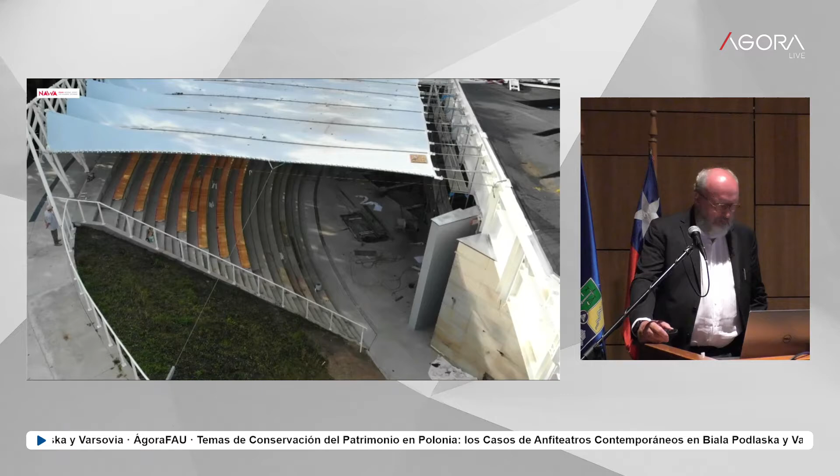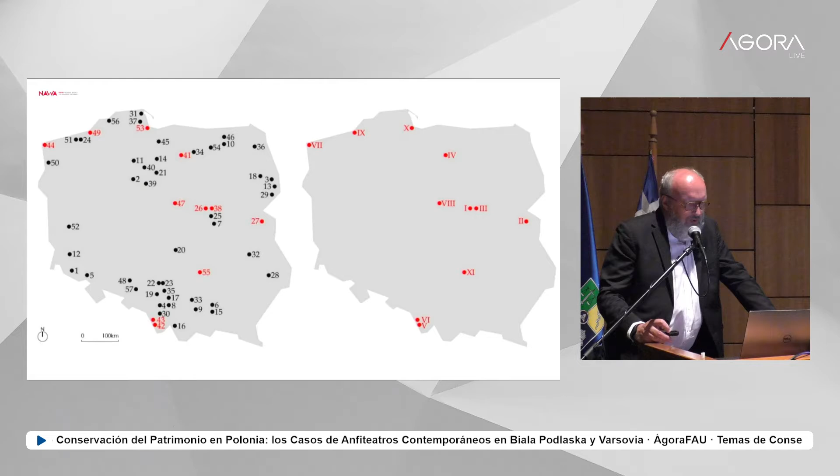This film shows us one of the Odeons - in my lecture, Odeon is the term I use for an amphitheater which was covered by a roof. Before I show you two designs, I'd like to show some research I did and published, depending on amphitheaters built in the last 30 years in Poland. On the left you see the map of Poland with dots and numbers - these are the amphitheaters. On the right you see the Odeons, meaning the amphitheaters which were covered by a roof.

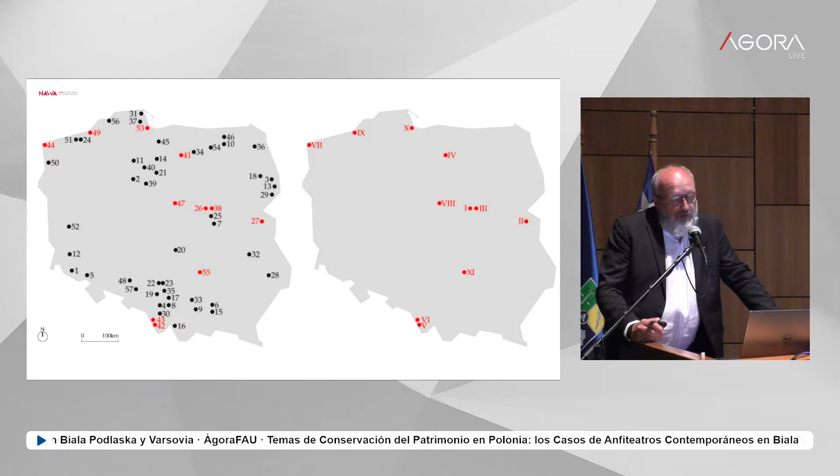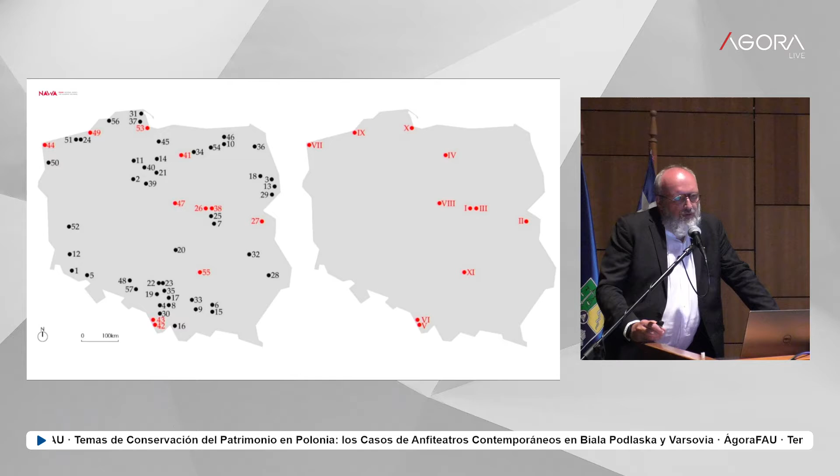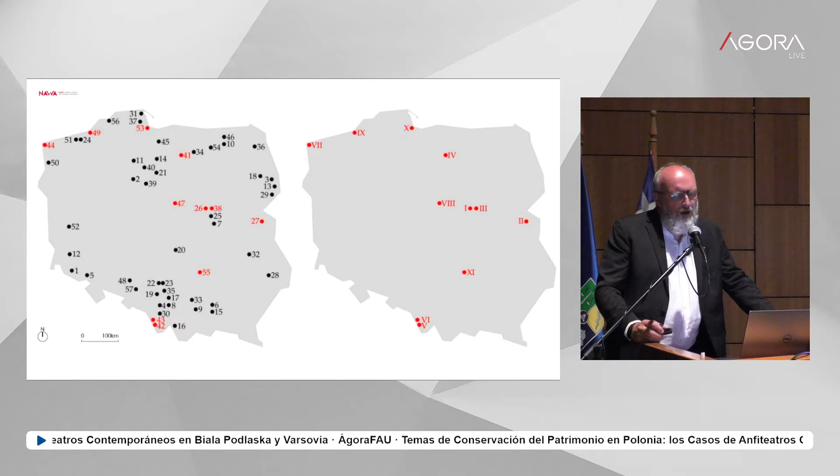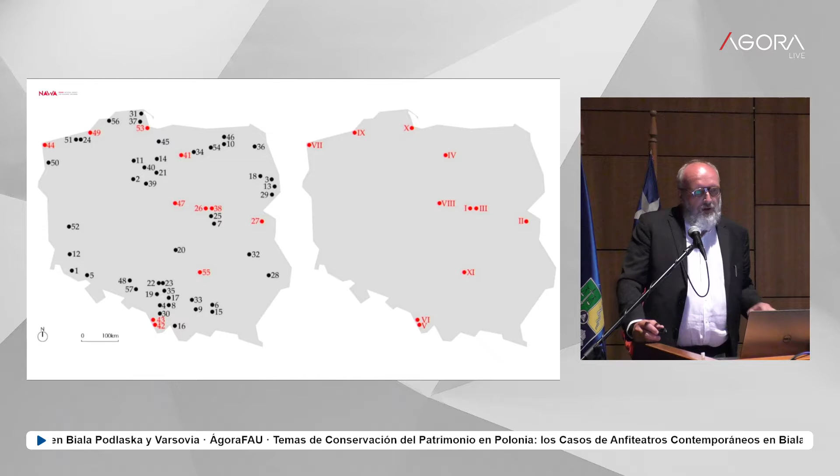The climate in Poland is relatively hard for open-air activities, because if an area like an amphitheater is not covered, it can only be used from June to the end of August or beginning of September. But when we cover it, we extend this period twice - we can use it from April until the end, or mid-November, because the temperatures are quite good in this time, but there's a lot of raining. Especially characteristic of Poland, in the middle of summer, beginning of August, we also get a lot of rain. So if we want to use amphitheaters as open space and be sure we can organize something, we have to cover it - this is one of the reasons.

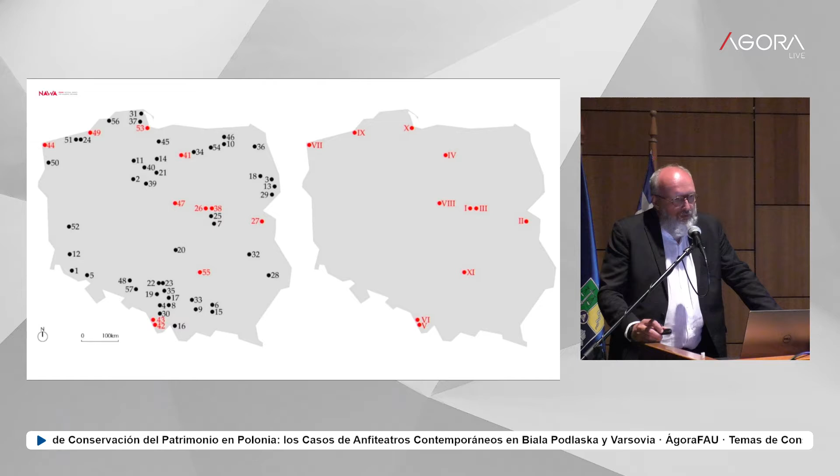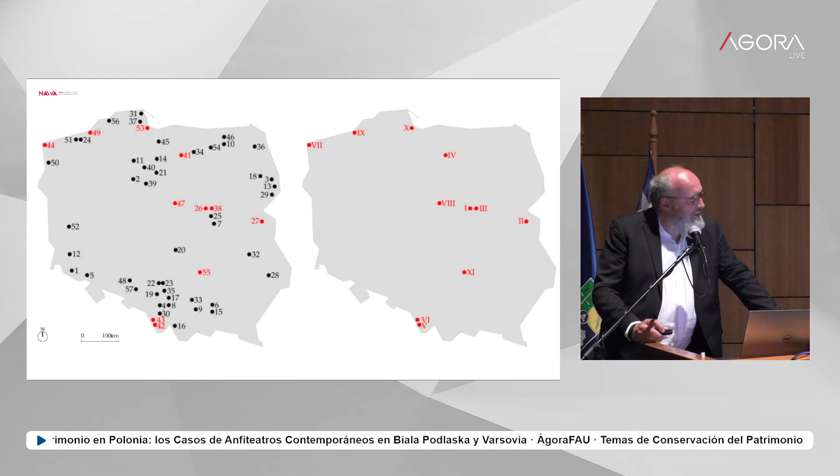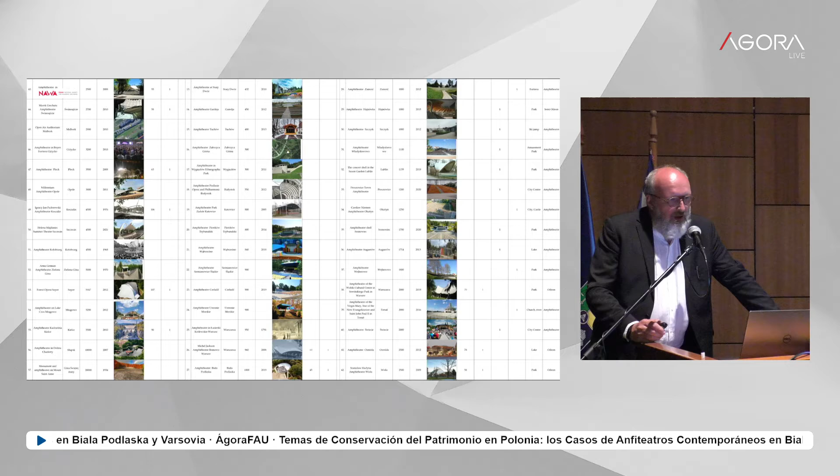The second reason is money, because for a long time Poland had problems with the economy. But during the last 30 years, after transferring our economy to a much more efficient model and becoming part of common Europe, the money came, and the Poles are using this money, also a part of it for extending cultural capabilities. Building the Odeon is one of the values of being part of Europe. Here you can see a collection of amphitheaters in different forms, following my research - take a look for free at these Odeons.

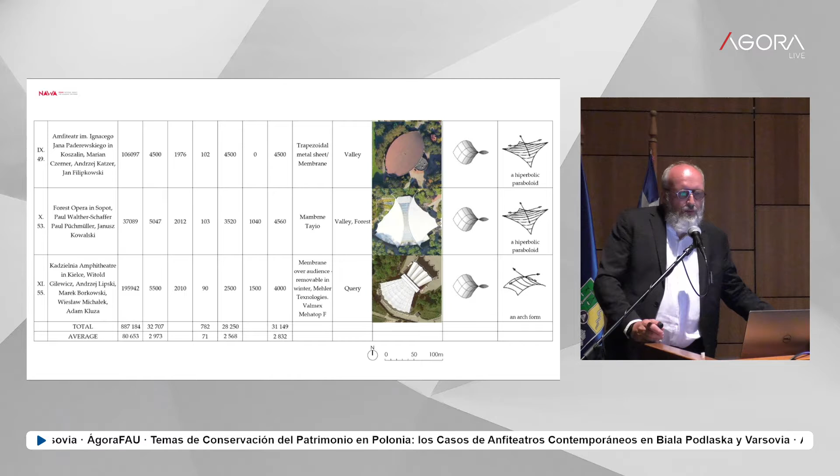Because I would evaluate the size of the covering, the structure, how the form was created, and other elements. Finally, we can see a collection of all these Odeons which were built in the last 10 years in Poland, starting from the smallest one, from 800 spectators, finishing - this one on the left corner - down on the right corner with the biggest one.

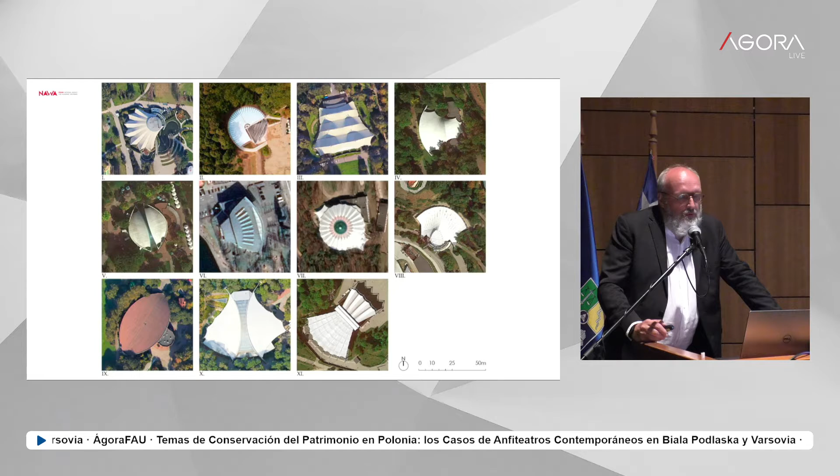About 6,000 people - so this is the scale of the Odeons. Our Odeon, the second one, is for 1,000 spectators. What is interesting is that the shape of the covering and the forms of all these Odeons are different - we cannot have two similar forms. The ideas are different, the shapes are different, and this is one of the results of the research.

But what happened inside such kind of building is also part of the study. As you see, concerts of well-known artists are the main important activities, and sport performance is a less important activity.

Also what is interesting is that a lot of these buildings are built outside huge cities. It's relatively in small cities where the people cannot use concert halls, the regular culture buildings, and this is one of the values that we got. We can bring culture to much smaller towns and cities, or in big towns, in some parts, like some suburbs of big towns - it also exists like an extended possibility.

If we take, for example, Warsaw, we will see one of the examples from Warsaw. At the moment, Warsaw has a lot of concert halls because it's the capital of Poland, but in some areas, some suburbs, there's a lack of such kind of culture building, and for this reason they decided to build an amphitheater.

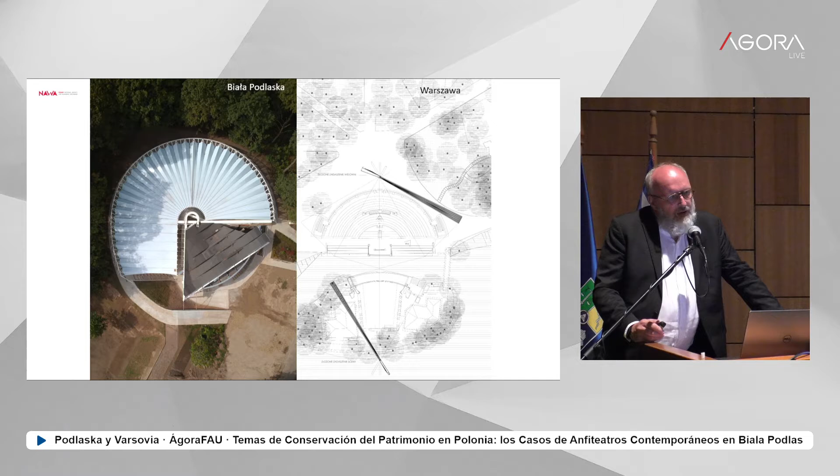I would like to show you, as I said before, two of my designs which were done in my office. One is in Biała Podlaska, a small town near the eastern border of Poland, very close to the Belarusian border. The Polish-Belarusian border is very famous in the news.

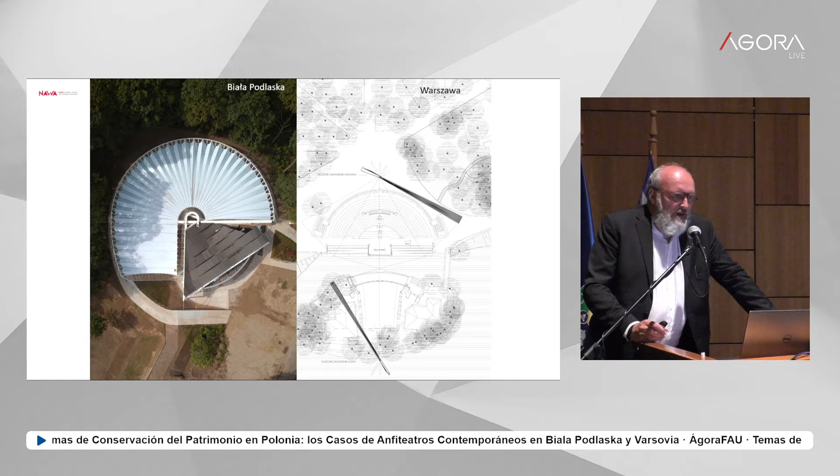I don't know how it's published here, but probably you heard something about this - that we have a huge influx of immigrants from the Belarusian side. Anyway, Biała Podlaska is very close to this area.

And then the second is in Warsaw, in the very historical Royal Park which we call Łazienki - King's Bathroom. It's from the 18th century urban scheme from that time.

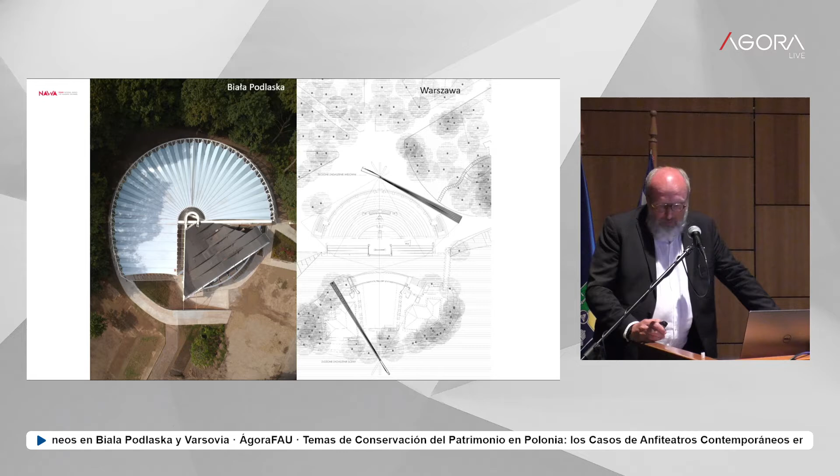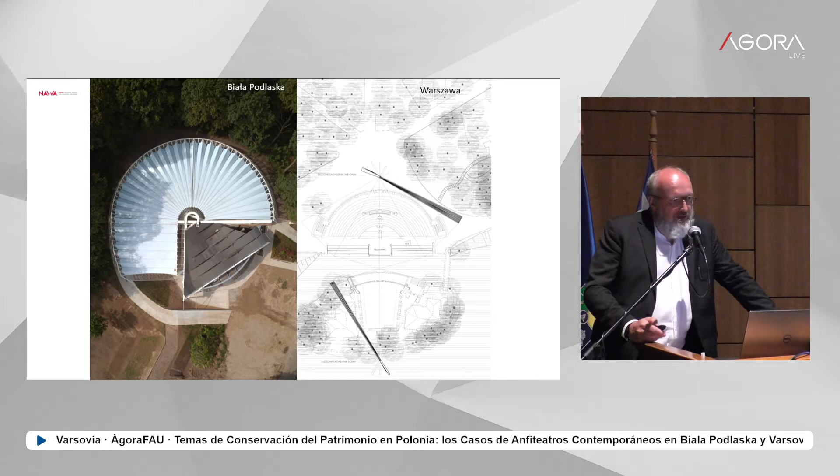Biała Podlaska is also interesting because it has a 17th century fortification based on the Dutch or Netherlands concept of fortification from that time, not far from the palace in Biała Podlaska, because it was the royal family which also had some palace there.

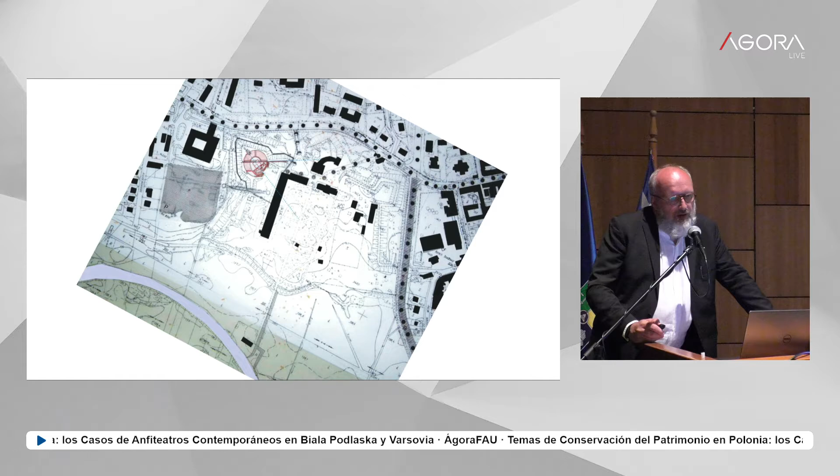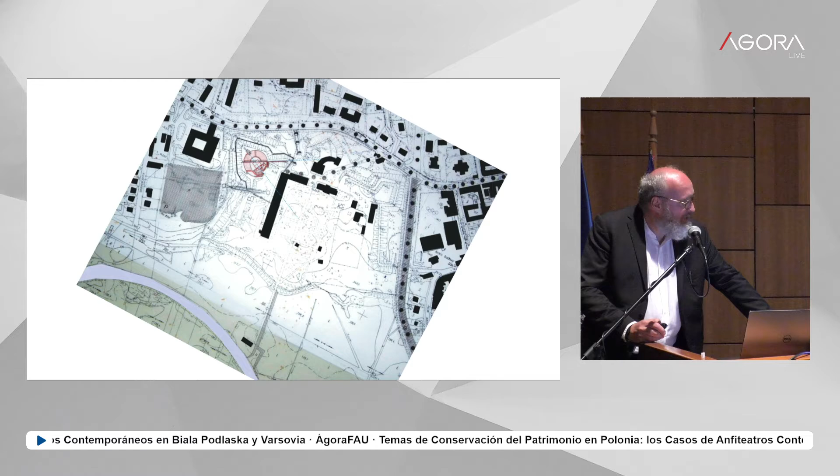This shows our first concept, because we won the competition in the mid-90s, so it's a long time ago to prepare and to build the amphitheater.

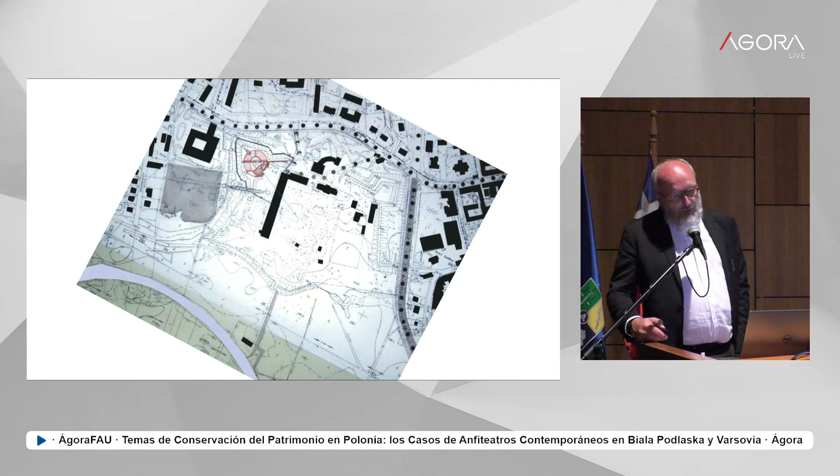During this competition, we won mostly by using the geometry of this fortification. We studied the geometry, how it looks, and we decided to build in one corner, the left corner, marked by red color. It's a new intervention into the old structure.

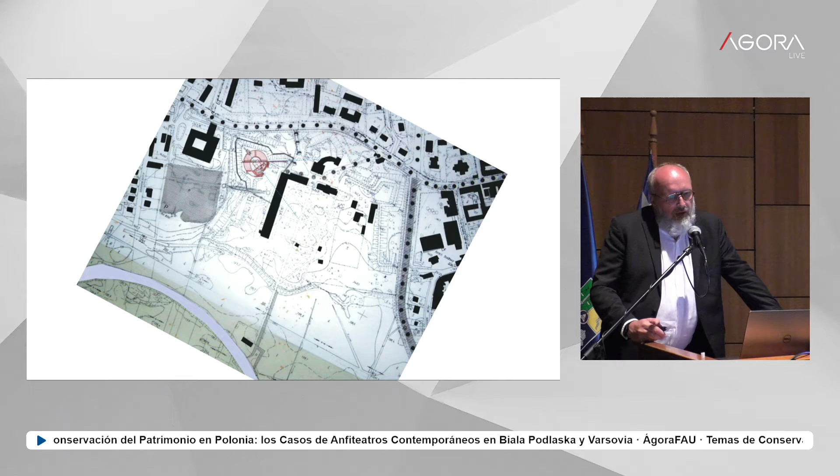The building on the right, marked by black color, is the support building for the palace, and the palace doesn't exist anymore. The palace had its place somewhere here - it was located in this place before.

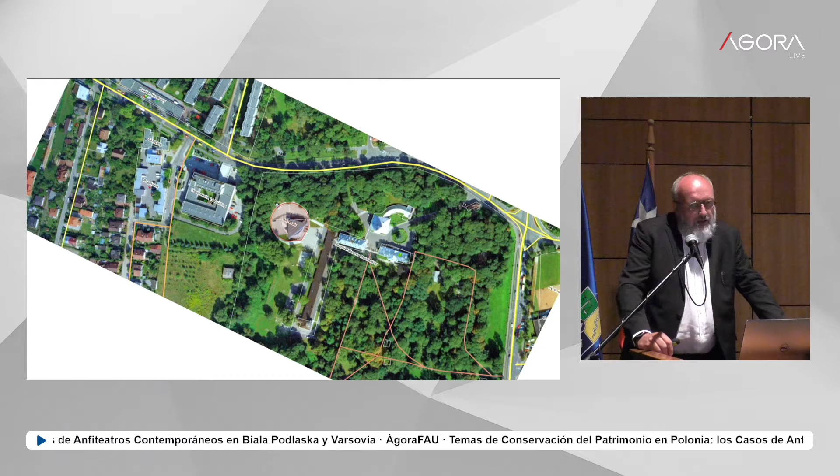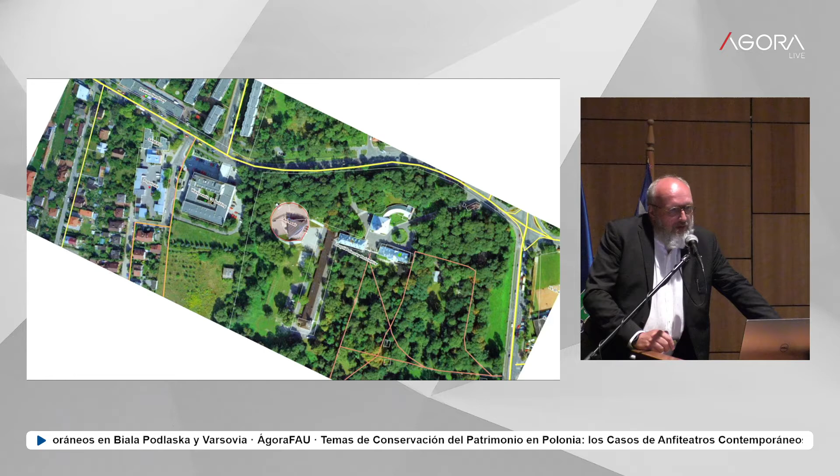All of this fortification was covered by green, and it created a park. It was a very interesting park, but the greenery there had no design. What happened in the following year, as you see, there's a lot of greenery here, and also our first concept and first realization of the amphitheater looks like this compared to the area.

But this area was under protection by the conservator - a kind of administration office in each Polish town, especially in towns with historical background. In Biała Podlaska there's a very strong position held by the man who takes care of conservation.

He was open-minded, in my opinion, because a lot of conservation guys are against anything new. But he gave us only one rule: we cannot make the structure higher than 3 meters over the old fortification. That's why we decided to design the amphitheater in such a way that we dig something inside to create a proper scale.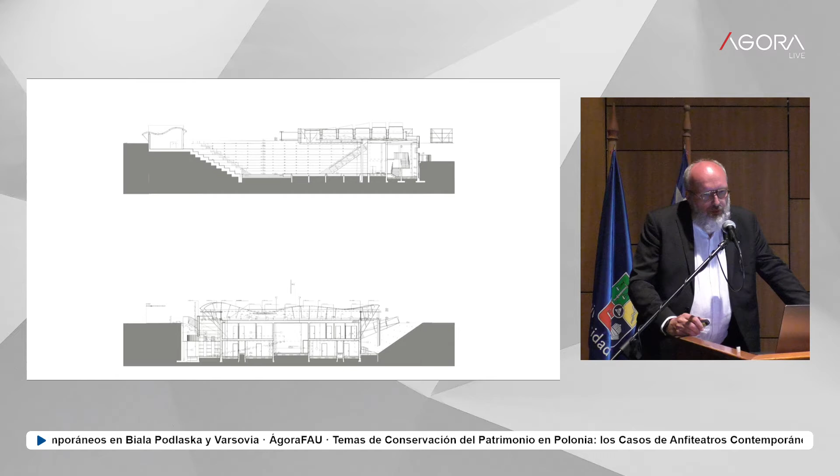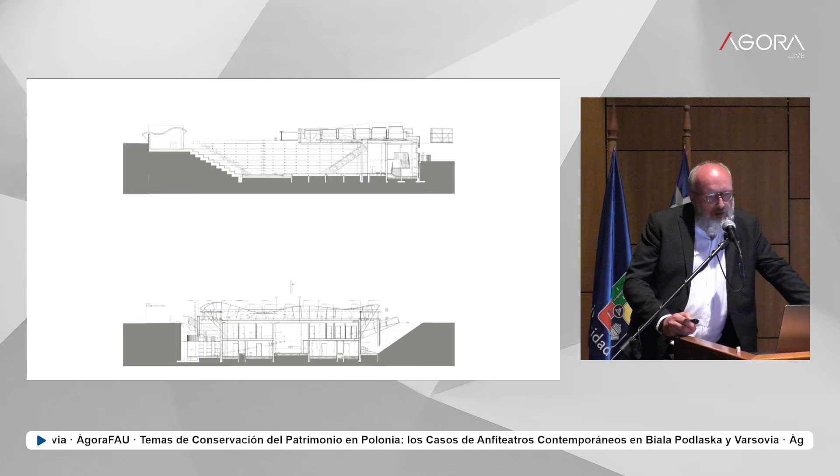As I said, we cannot break the rule of 3 meters over the fortification. Here it's very clear on the section, because we dug down a little, and finally got the difference between the roof structure and the stage level to be about 10 meters high.

It was one steel structure. Maybe you're interested in what is under this steel structure, because during construction it was stopped for 2 years, since at one moment we found old walls, and these old walls captured the imagination of the construction office at that time.

They thought it was the first building in Biała Podlaska, and for this reason they wanted to show this building and stopped construction to make new documentation. We agreed to cover it with the steel structure, and you can take a look underneath to see what happened with this wall structure. But it was not very good for the stage, because the stage was divided by an extra element which was not in the first concept.

But finally, 4 years ago, they decided to cover the amphitheater, and they called us to do it. So we prepared 3 schemes for how the covering could look, and what kind of structure we could use, and finally we started to create the Odeon.

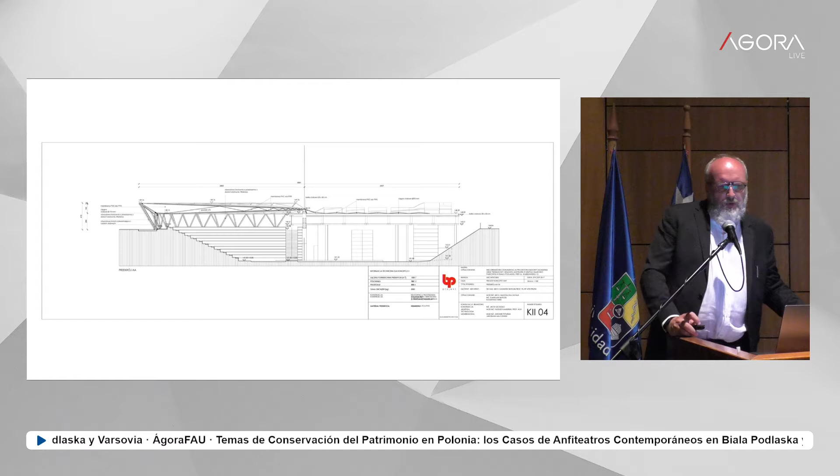The Odeon began with removing all the spectator area and cleaning it, and choosing one of the concepts which you can see here. Again, we are not changing the shape - I mean we are not changing the shape of the section and the depth.

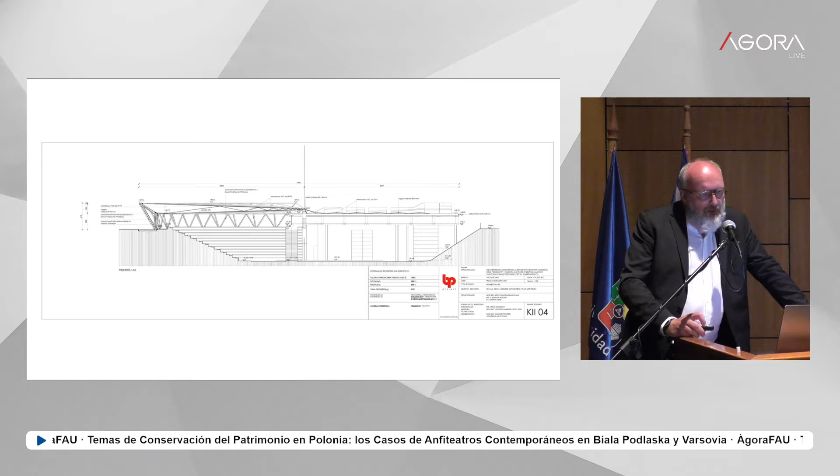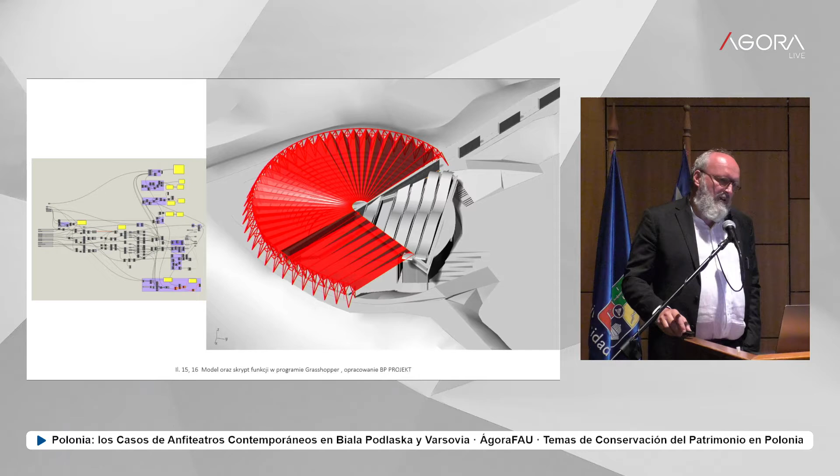We also wanted to stay within the 3 meter level, not crossing that level over the old structure and the primary design. But the problem, if we design this building in such a flat, relatively flat structure, was how to solve the problem with the water.

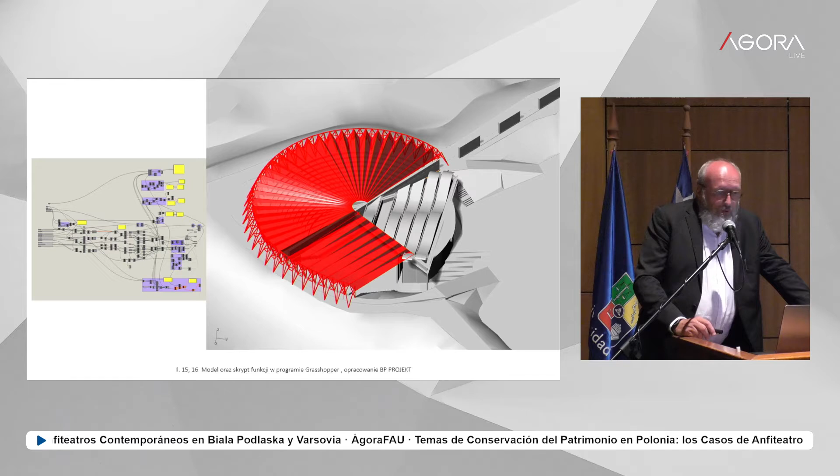For this reason we made a lot of models and finally decided on the shape you see here, because this way, being relatively flat, we can drain the water out. So the idea was to fold the structure using 2 geometries for folding: one is the semicircle, and the second is more or less rectangular.

What have we done - how does the addition, the Odeon creation, look based on the amphitheater? It's shown in 3 steps. First, we have the existing structure - especially this beam - which was not strong enough, so we added some construction elements there. Then we made the circular, transparent steel construction, and finally we covered it with the semi-transparent membrane: first, second, and third.

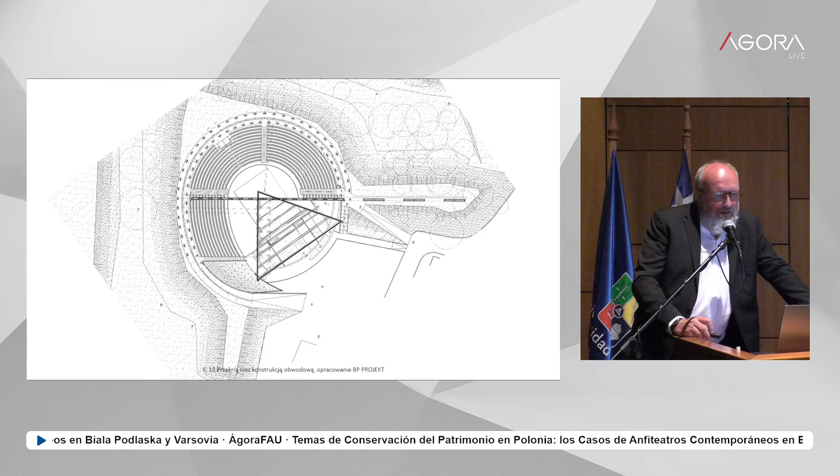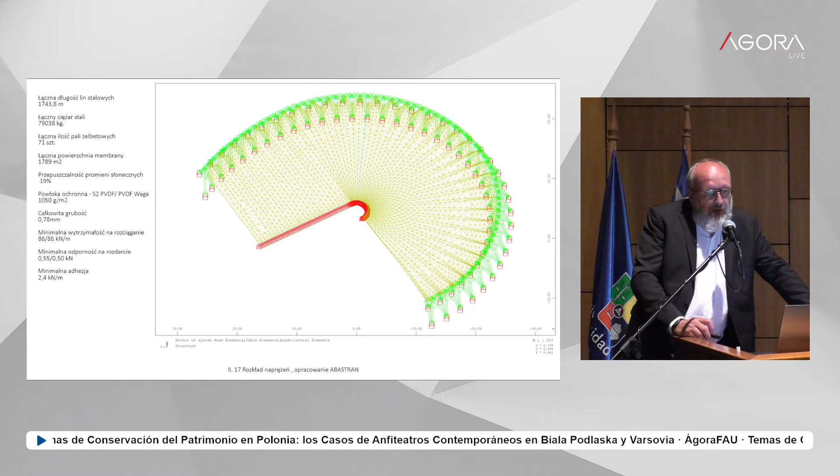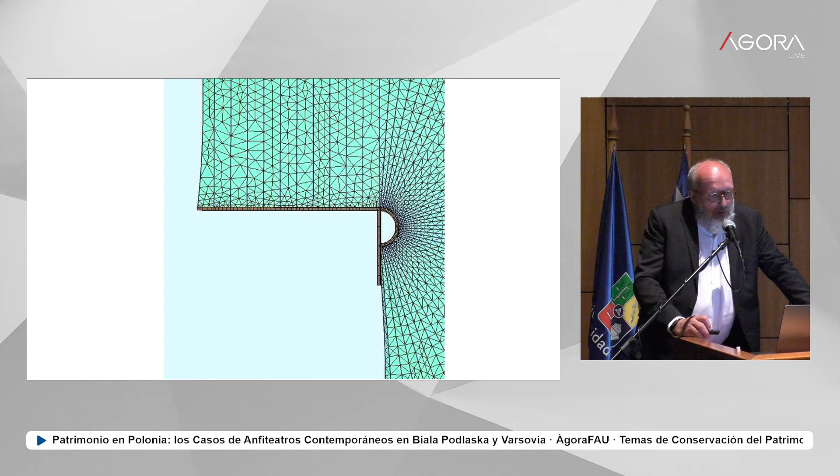So, the drawing from the construction stage, and again the structural analysis showing the strength of the materials, because the membrane is also part of the structural system, not just a covering material. So this is important during evaluation. Here are some details of this analysis, which I also found interesting from the aesthetic aspect of this design.

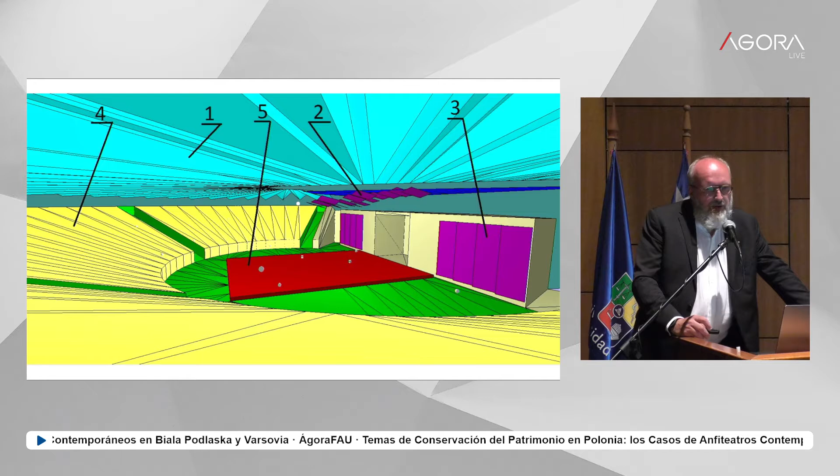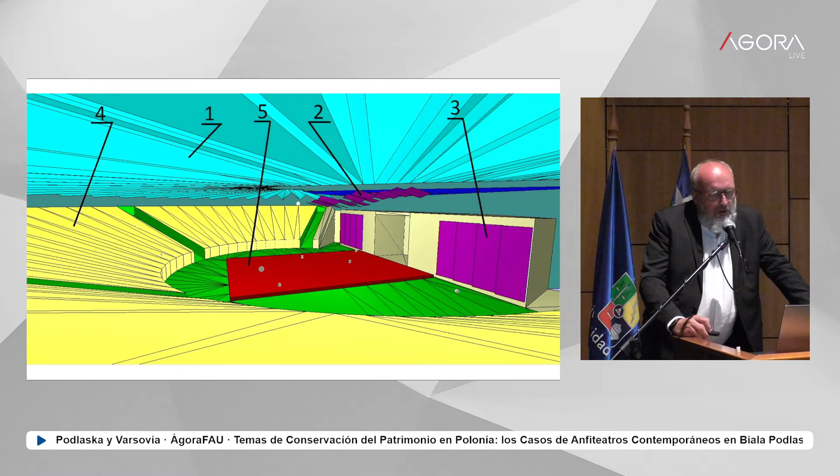But not only was construction a challenge in this design - also the voice preparation, especially since you'd like to use it like part of a concert hall. For this reason, we did detailed research on how to improve the quality of sound propagation. Here you can see some analysis - blue and green marked areas mean good sound propagation, and as you see, only some parts, especially at the end of the circle marked red, show that the sound propagation is not the best, but it's relatively reduced.

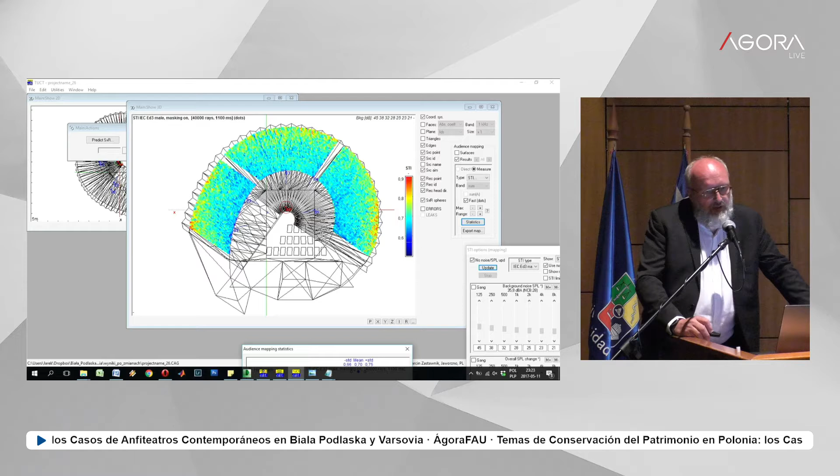So the shape of the roof was first important for water drainage, but secondly it was important for sound propagation, and this folding gives us very good sound quality. This was the final design, and it looked like this. But at the same time, the city also decided to make improvements to the park.

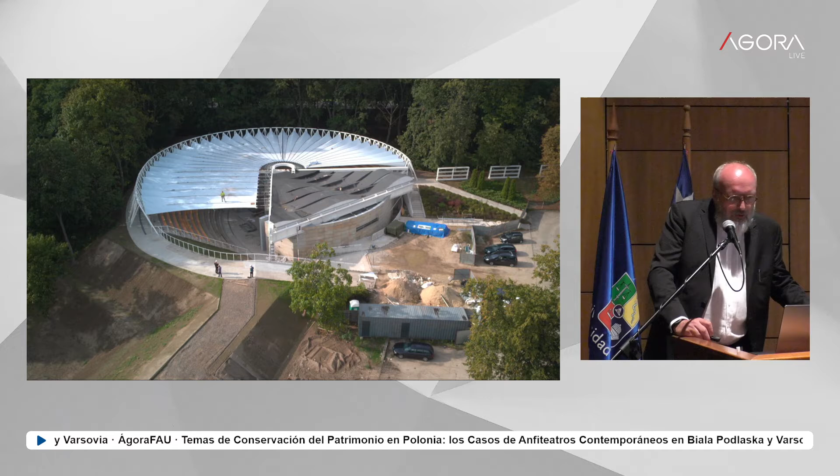Some pictures of how it looks today. What I'd like to express is that it's a very thin structure, but it's also very strong, because we can walk on it and also clean it. This man standing on the roof shows us one of the possibilities, that we can walk on it.

Another interesting and a little bit unexpected effect was that some leaves during part of the year lie over the structure, and it takes another shape, another view, another effect. Also, the strangeness of the structure gives us not exactly a straight line, but a line which is a little bit curvy. Here you can see it just before finalization.

I stop at this moment because, as you can see, today this steel structure covering the old walls doesn't exist.

What's interesting is that during the 15 or so years between the opening of the amphitheater and the opening of the Odeon, the conservation concept of these walls changed, because they discovered it wasn't the first building in Biała Podlaska, it was a relatively unimportant building, and for this reason they decided to remove it and only leave some sign that such a structure existed here before.

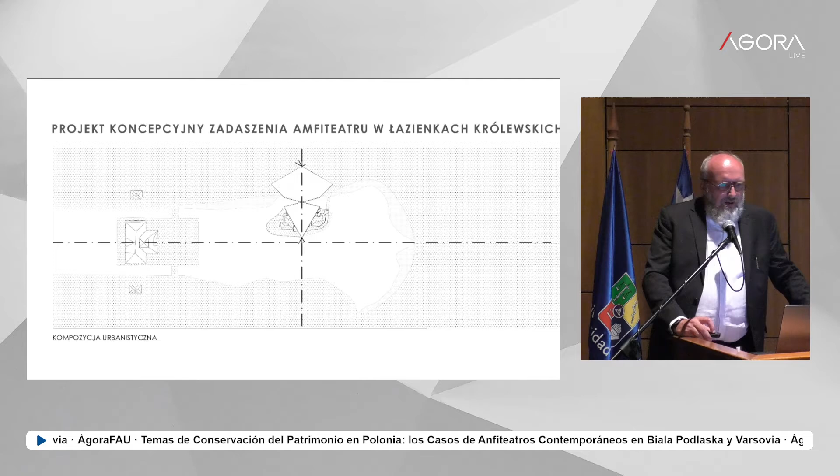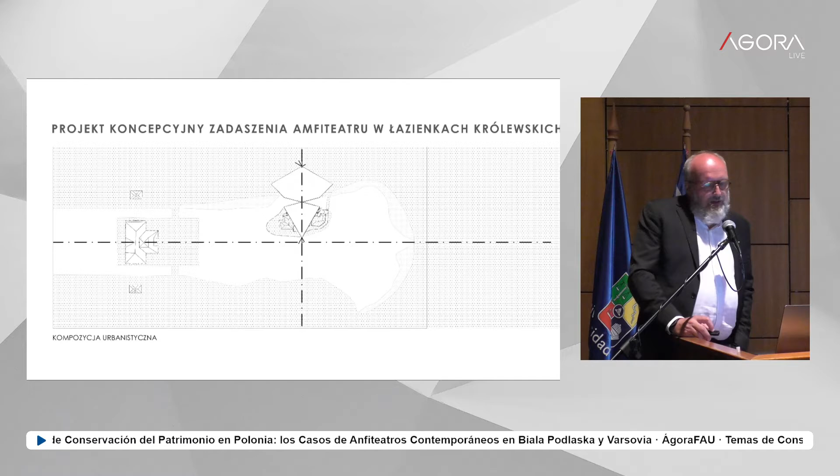This is the oldest Polish amphitheater, which comes from the 18th century, and it's an artificial thing also.

A year ago there was a two-stage competition to prepare a temporary covering of this existing 18th century amphitheater. We took first place in the first stage, and then first place also in the second stage. I'd like to show you what we did, and also explain why it wasn't realized after the discussion of the jury.

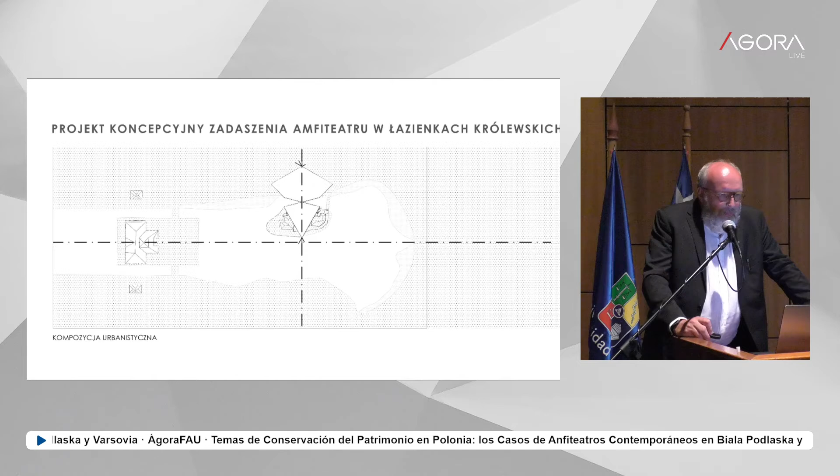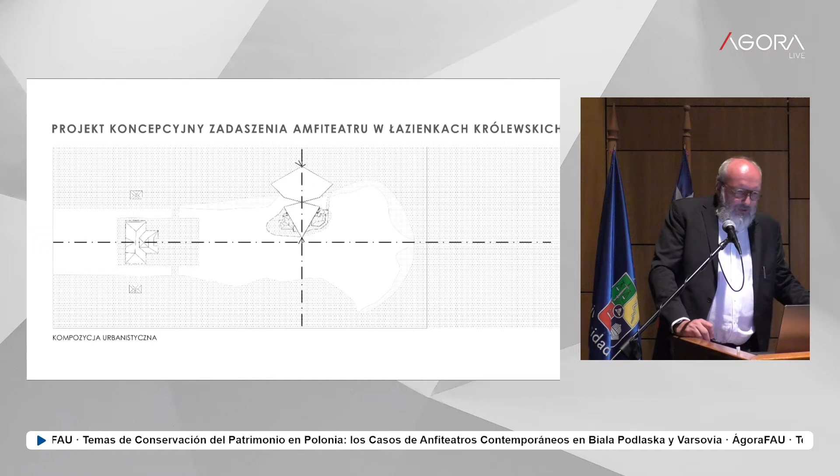The rules of the competition were that we cannot build a ready-made structure which stays permanently — it has to be a structure we can remove. For this reason, they expected that the intervention into the existing and very valuable park and amphitheater would be as minimal as possible.

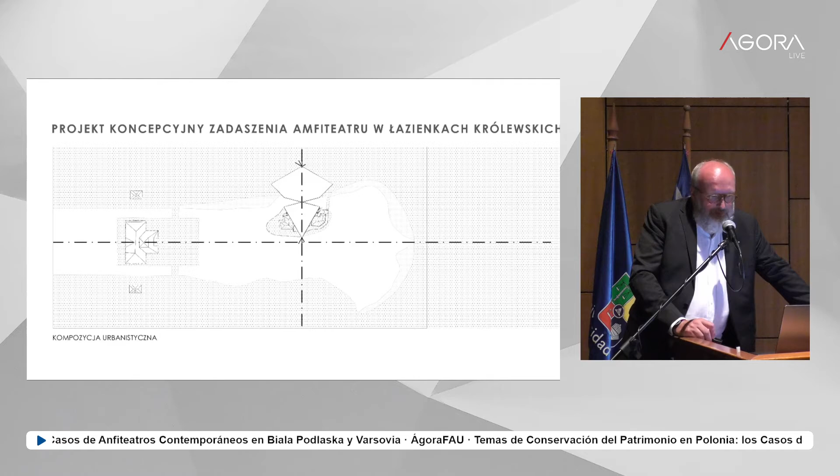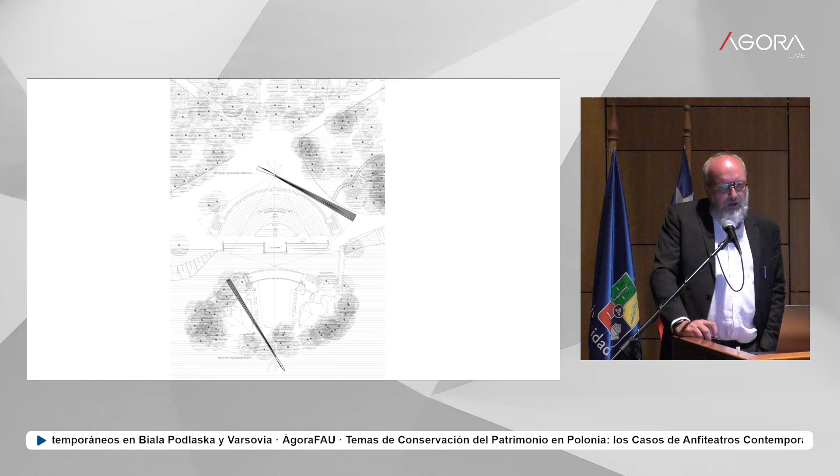Our concept was based on a movable structure with only two pillars — one pillar behind the spectators' area, and the second pillar behind the stage. Here you can see the concept in the position which is not open.

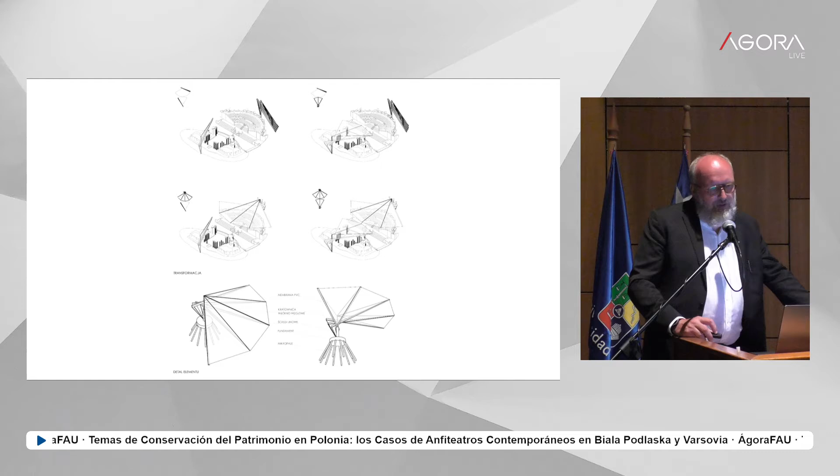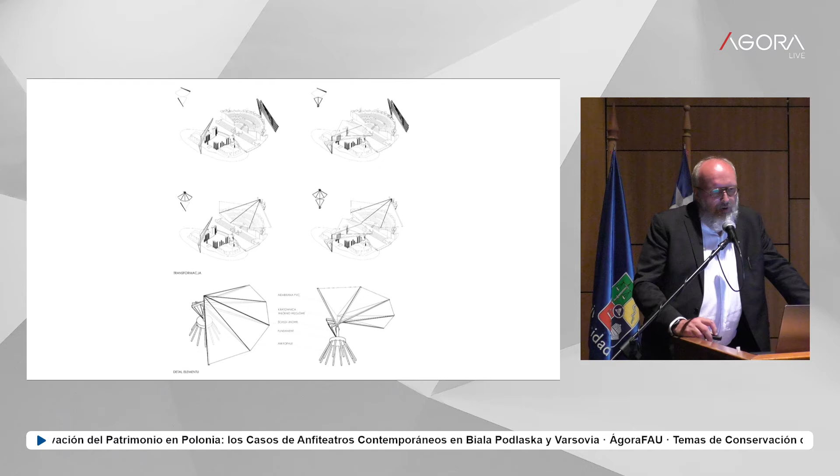Then you can open it in many variants. You can open it over the stage, like in the right picture, or you can open it only over the spectators' area, or you can open both. So it's a movable structure, depending on the needs and how you decide to use it.

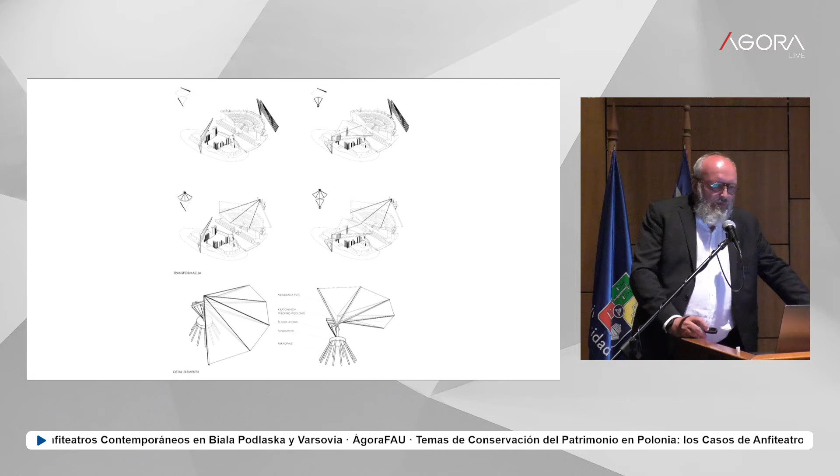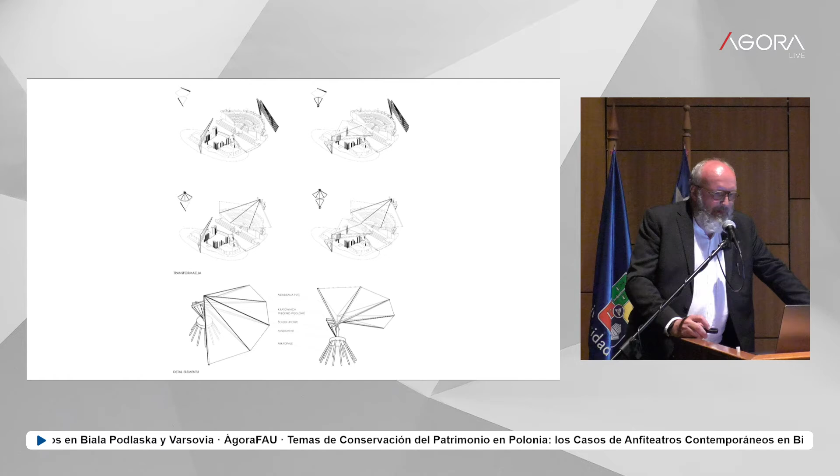We only have one pillar above, but as you can see the structure underneath is relatively big, because it's a huge construction element, and there's a lot of pressure from the water, from the wind, and from other factors we have to resist. So what you see under the ground is a relatively huge structure, but above the ground it's relatively small.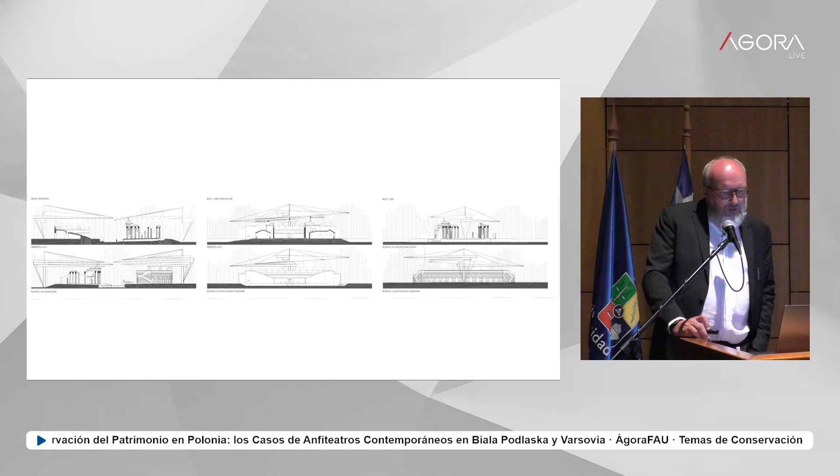And how it's working comparing to the existing, here you can see some pictures because it was the movable element based on this column, and all of this was over the existing structure, how the section and elevation shows. I hope that maybe it's clear to see.

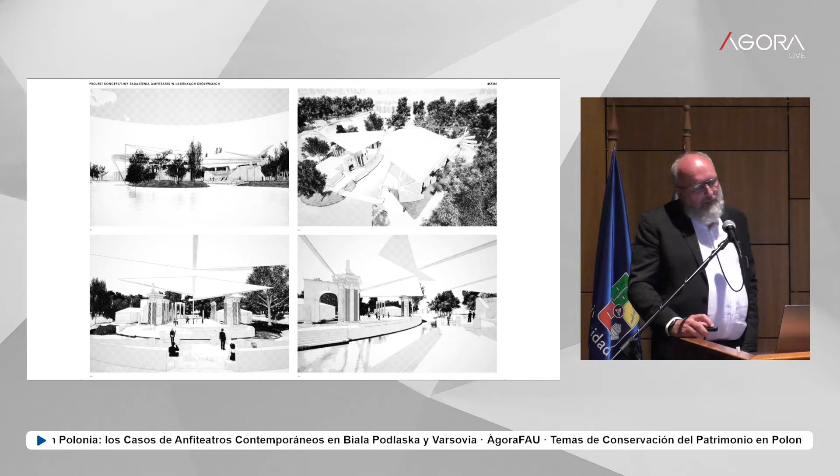And here we can see some elements, some renderings, how we imagine that it will be working. How you see, the concept is very symmetrical. And some other pictures look like this.

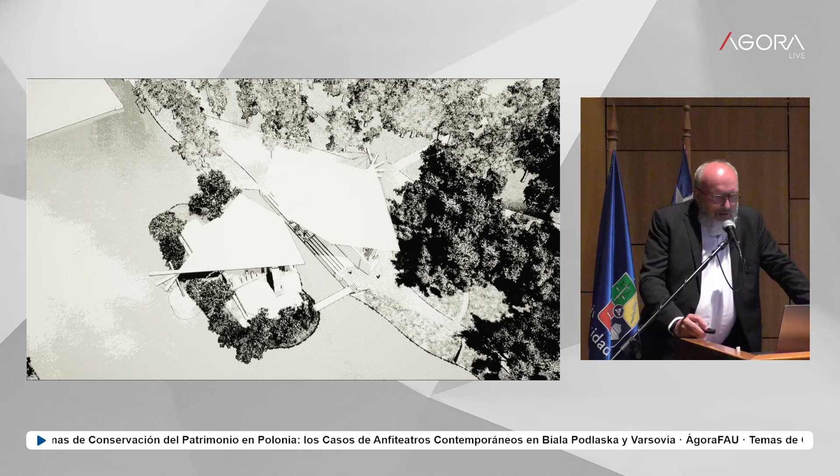What was also interesting, and maybe I haven't said this before, is that the stage area was over the island, so one of these pillars was located under the water. And again, this concept from another point of view.

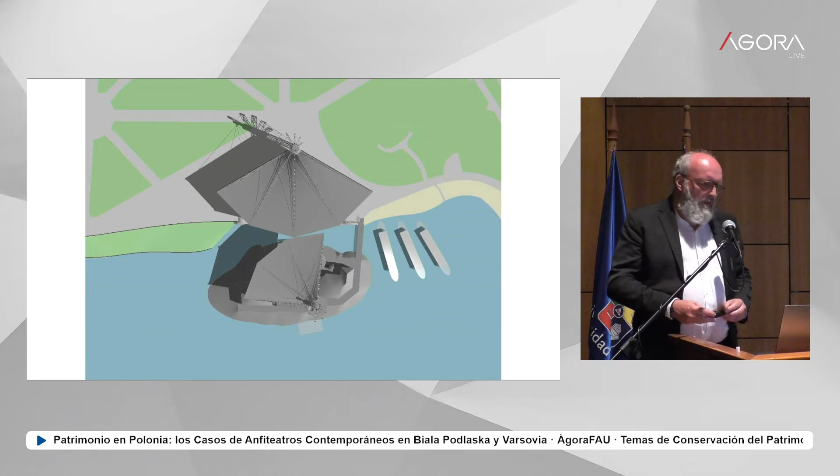And here, after the first stage, the jury gave some remarks, and one of the remarks was that they weren't happy that one of the pillars is at the back of the stage. So in the second stage of this competition, we decided to move it a little bit to the right and make the composition asymmetrical. This is one factor.

And the second question after the jury review was what happened with all of these elements when they are dismantled. You can see on the right side some images of the boats, because we got the idea to take it out and put it into the boat, so the boat will be like storage. So that is another concept from the second stage.

And again, you can see how it looks, our second stage entry. We also made these pillars a little bit more visual, meaning there is not a solid structure, but this is a structure made from many elements to be much more transparent. And finally, images of how it can work.

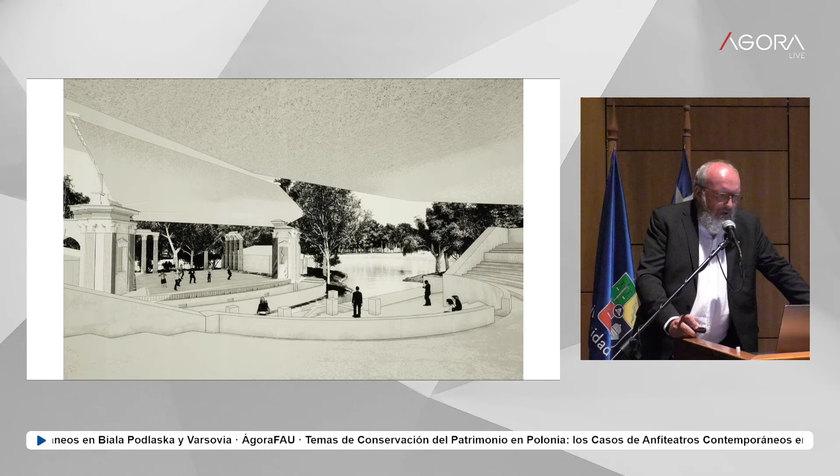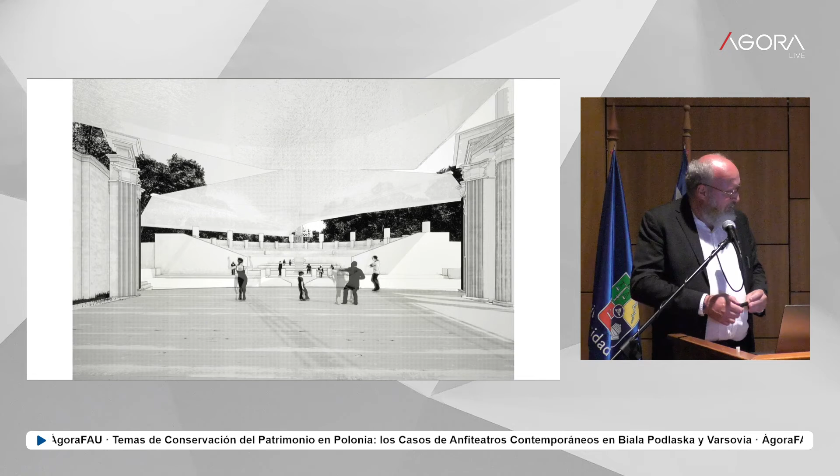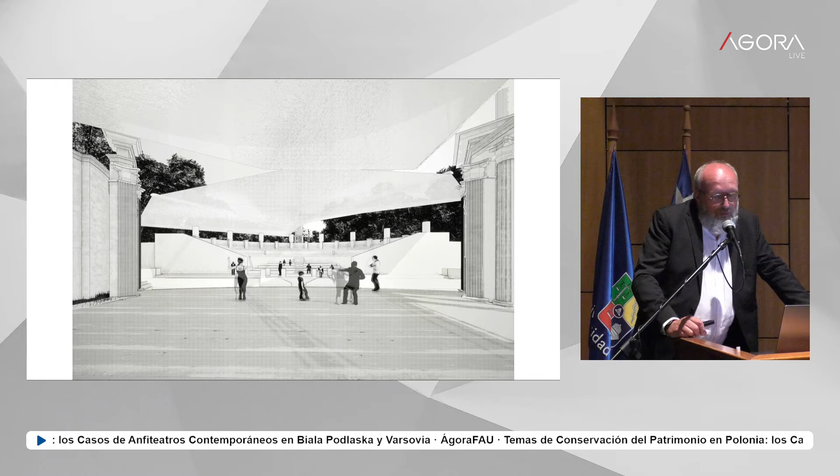And this is the last picture which I would like to show you. Coming back, to finalize something - this design wasn't built because, under the competition, there was a huge public discussion, and the people decided, talking that this intervention is too strong comparing to the historical value of this area, so they decided not to build it. I'm not happy about that, but sometimes it happens.

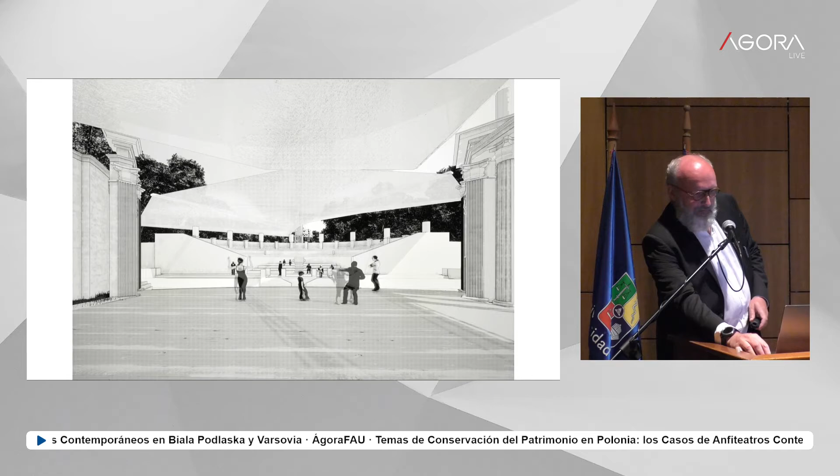Yes, absolutely. Yes. Okay. Mm-hmm.

So, first of all, there's the question between the first amphitheater concept and the final concept of the Odeon. This beam, we can call it, existed in the first concept as a very light structure, which we called the light bridge, and it was going up and down, and it was only one line in all of this park. But finally, the rules on how to conserve it meant we had to leave it.

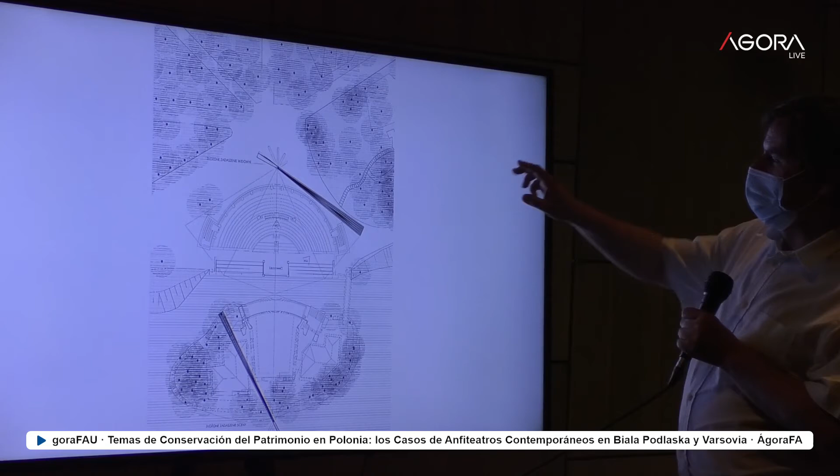Okay, and about the second project - yes, I'm going to the drawings. This drawing is in black and white. Black and white, what is the technique? It's very beautiful. I know they are beautiful, but to tell you the truth, I have to ask my son, who is also my partner in the office, so it's not my way. So as usual the architecture works - but there is another one about the views.

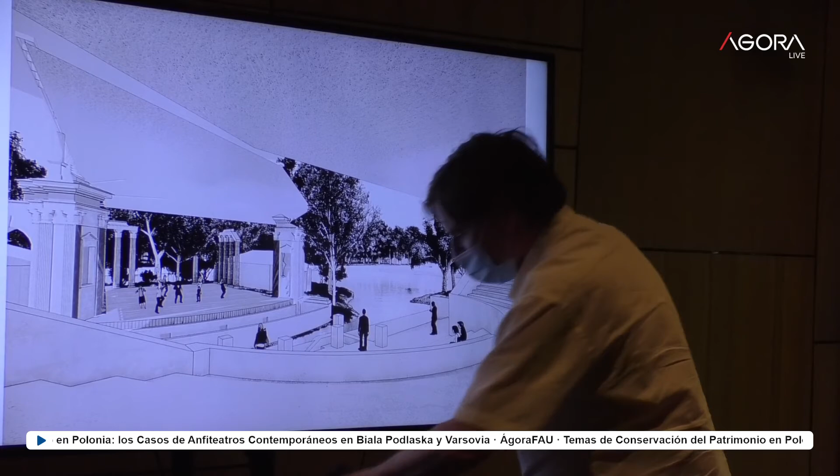I think from the second stage. Yes, yes, yes. Before - I think maybe this last one is - this one, it's like a graphic. So I think that it's not against the value of this area. So, as I said, I'm not happy, but I have to agree.

It's about the use of - it's a twofold question. One part is about the heritage protection institutionality, the institutions or procedures in Poland. I understood from your talk that this second project was in a way held up, or basically rejected, by the public. Does the public have the chance to vote or something, to not intervene?

But it was not my concept - in many cases we got the borders, so if we evaluate something, we have to know the limits. If we have no limits, it's not architecture. But on the other hand, if we are working with students and you say do something, it's very hard, because the borders, the limits, are also important. So it's a play in between.